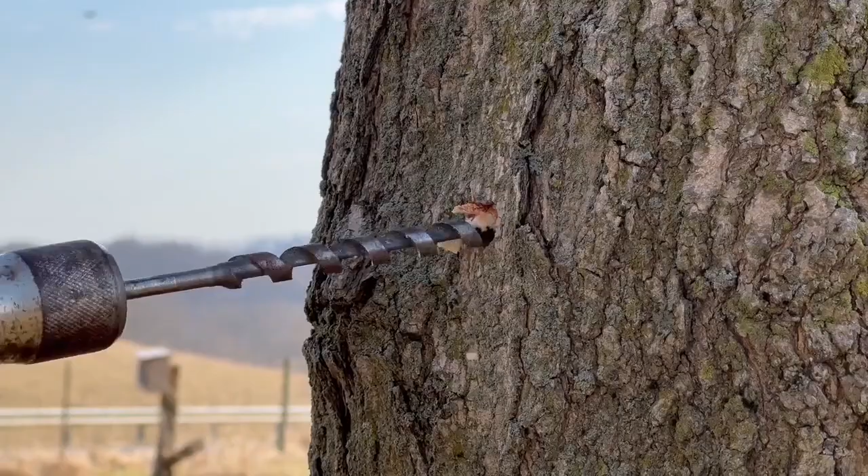Boring tools and equipment. Boring is the process of making holes in materials such as wood and metal. It is an important operation in agriculture, especially when building animal houses, fences, gates, and tool sheds. Boring is needed because holes are required for fixing nails, screws, and bolts. Boring tools include drills and bits.

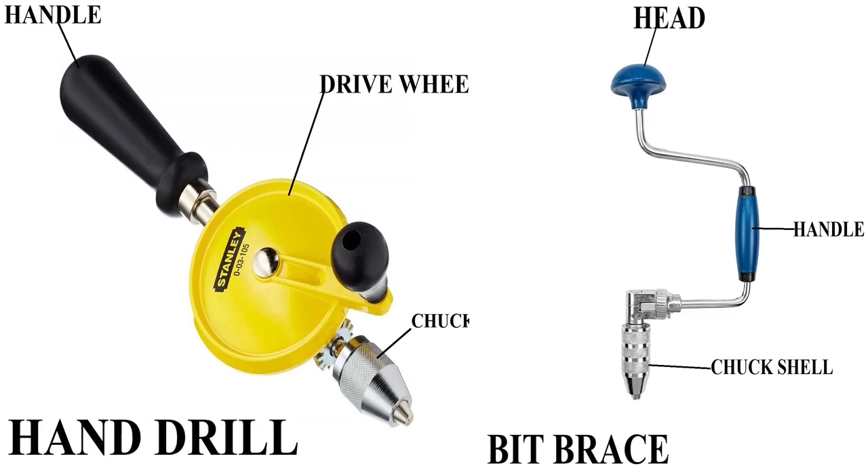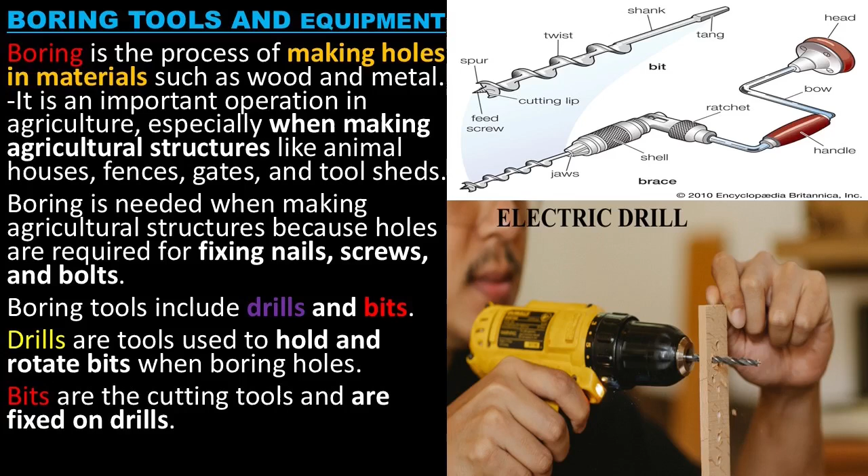Drills are tools used to hold and rotate bits when boring holes. Bits are the cutting tools and are fixed on drills.

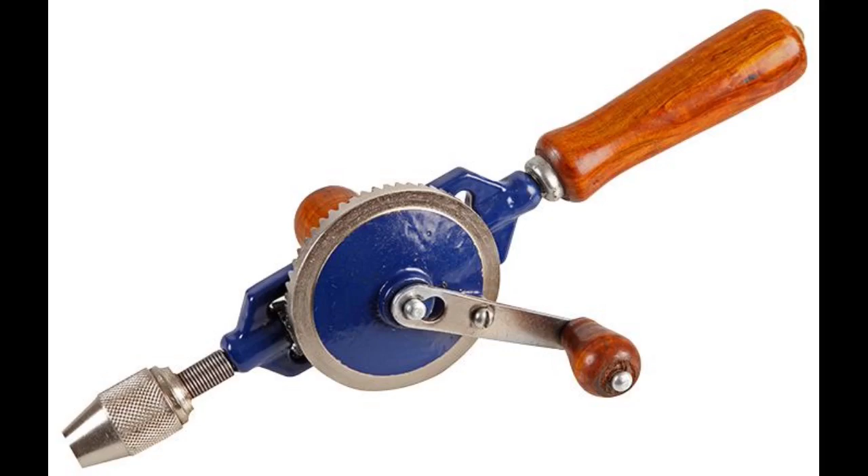Types of drills: hand drills, breast drills, bit brace, and electric drills.

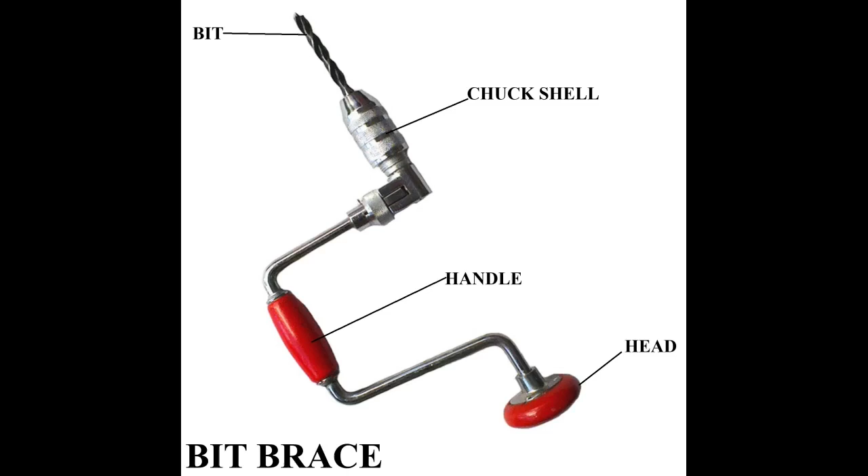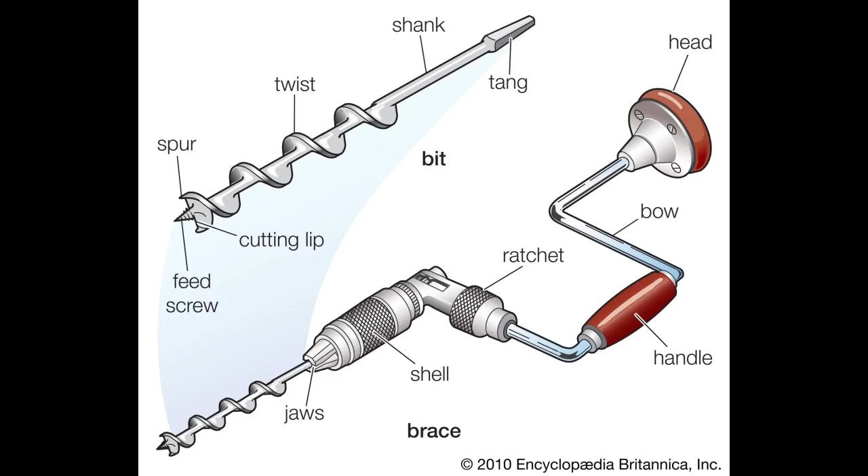Bit brace. A bit brace is a drill used to hold and turn wood bits for boring holes in wood. The desired bit size is placed in the jaws and tightened by turning the chuck shell. Bit braces are mainly used for manual drilling in woodworking.

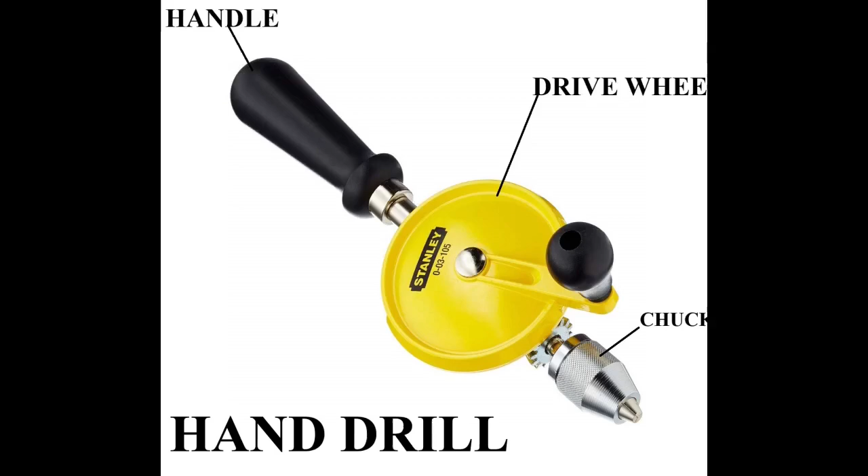Hand drill. A hand drill is used for rapid drilling of small holes in both wood and metal. It is simple, easy to use, and does not require electricity.

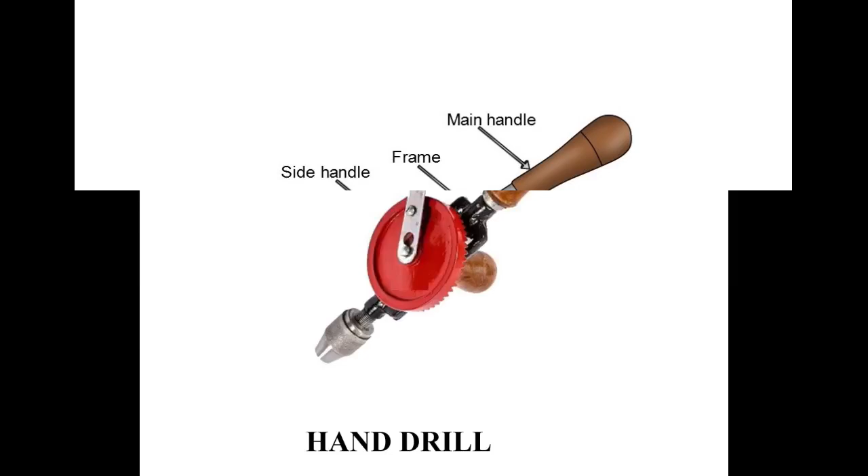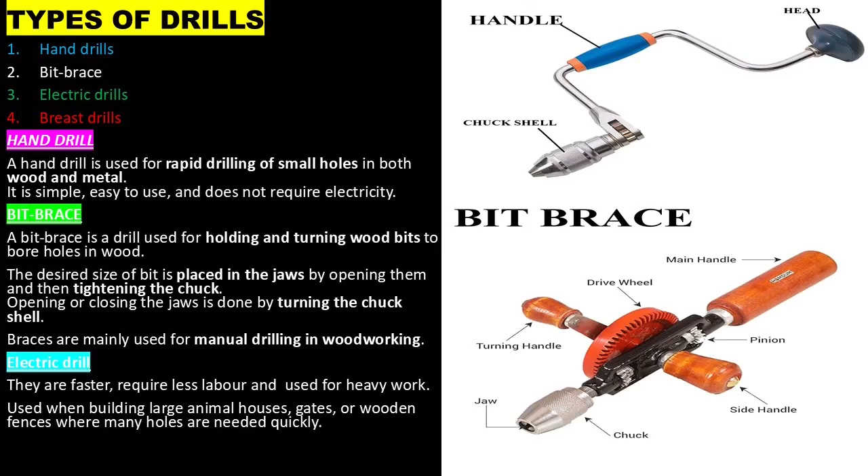Electric drill. Electric drills are faster and require less labor. They are used for heavy work like building large animal houses, gates, or wooden fences.

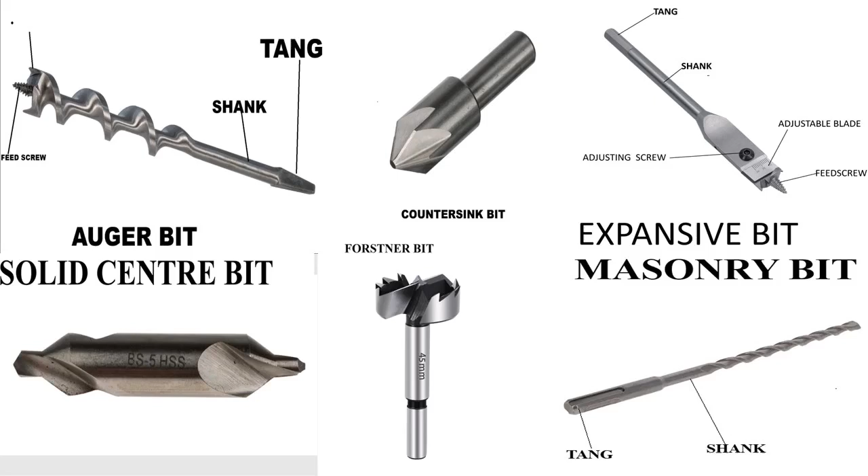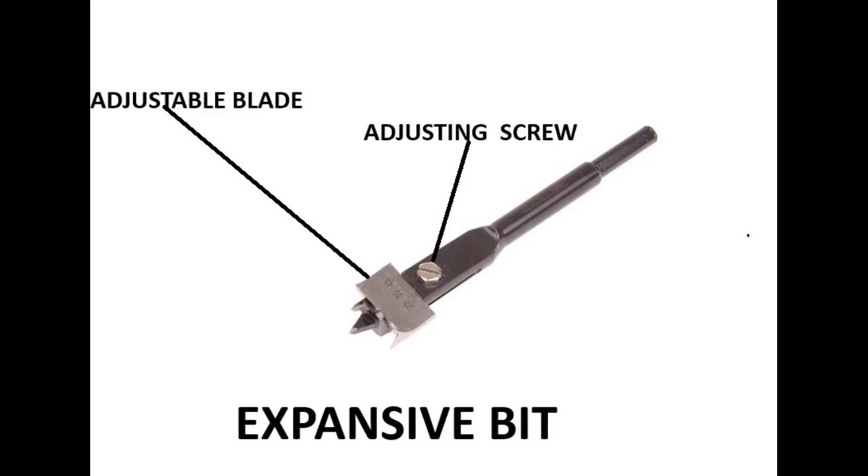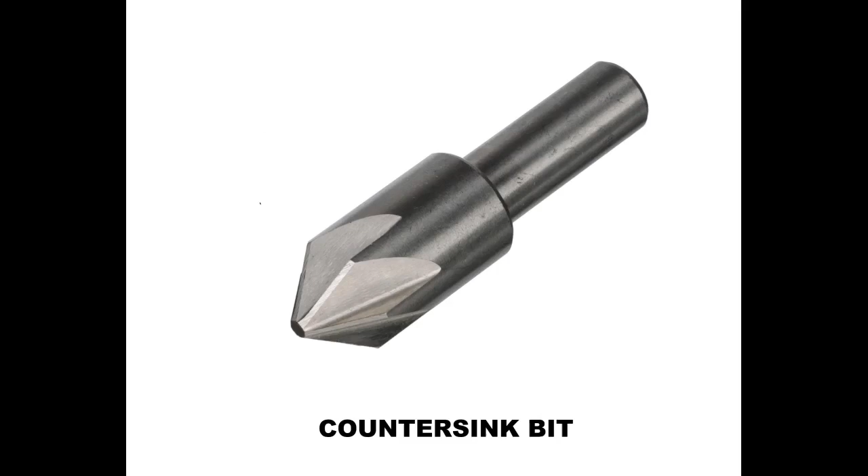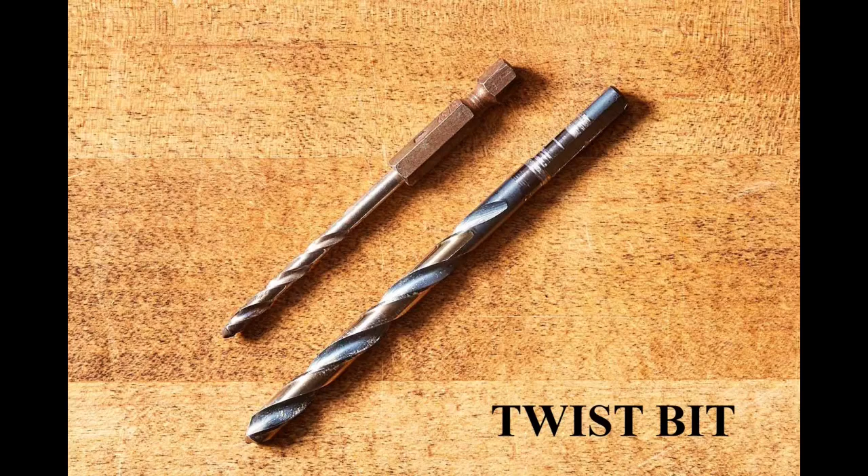Bits are cutting tools used with drills to make holes of different sizes and shapes. Common bits include auger bits, expansive bits, countersink bits, solid center bits, twist bits, masonry bits, and Forstner bits.

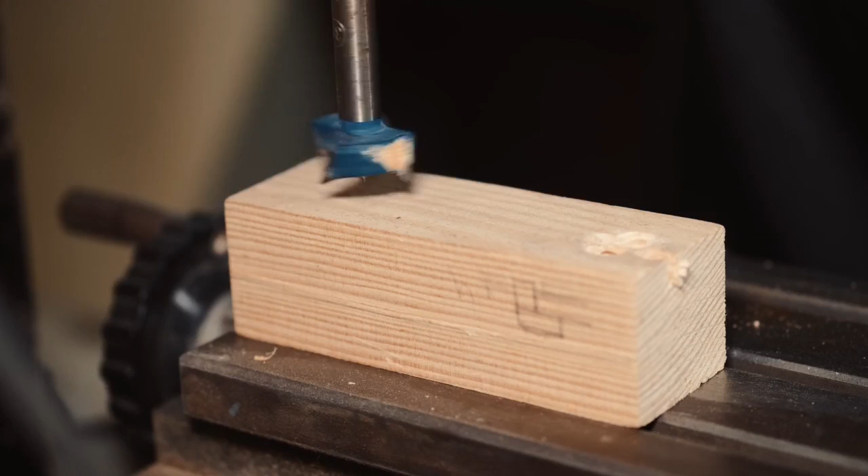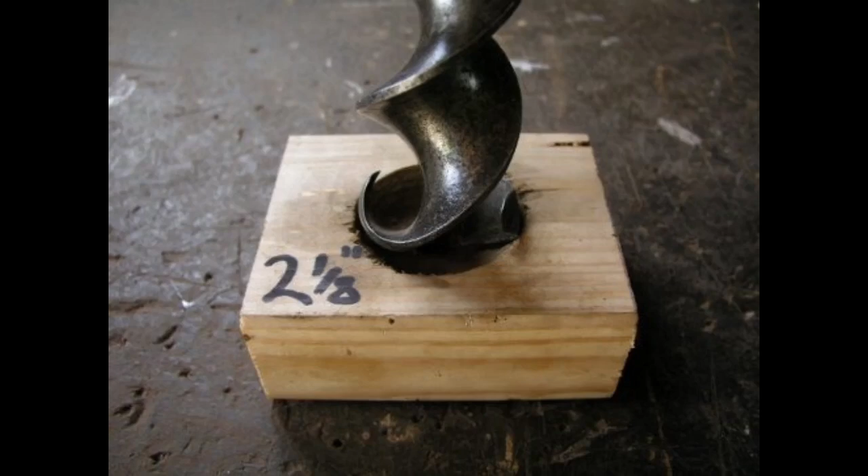Auger bits. Auger bits have spurs and a feeding screw. The feeding screw pulls the bit into the wood. The spurs help to cut clean and smooth holes.

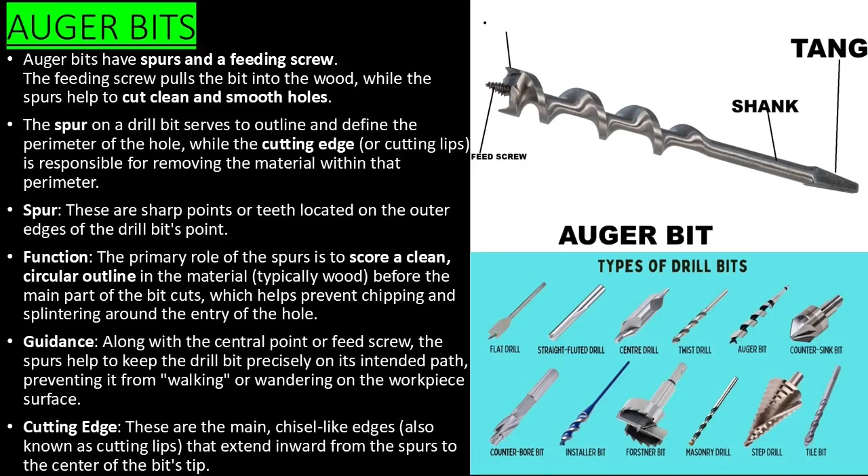Spurs are sharp points on the outer edges of the bit. They outline the hole and prevent chipping. The cutting edges are the main edges that remove material inside the outline.

Solid center bits do not have spurs. They are used for simple drilling where smooth edges are not essential.

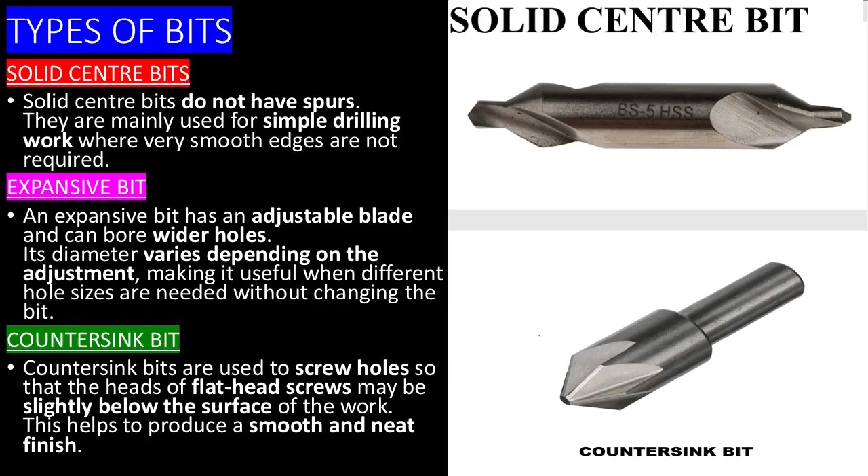Expansive bit. Expansive bits have adjustable blades. They can bore wider holes without changing the bit.

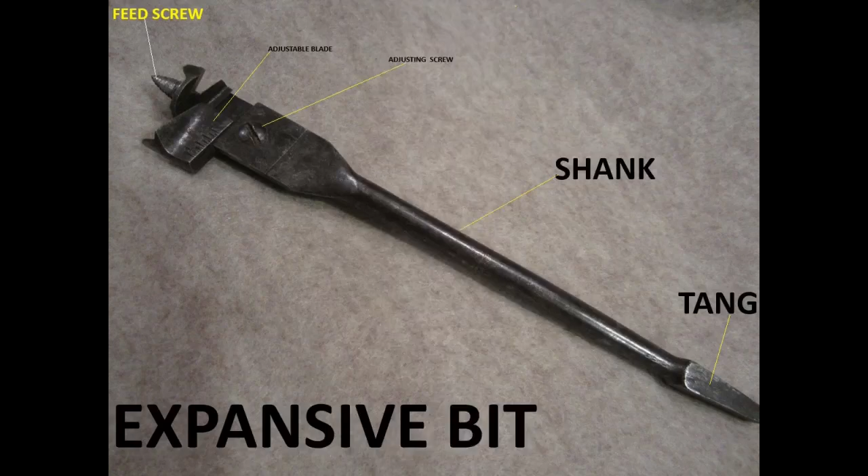Countersink bit. Countersink bits make screw holes so that flathead screws sit slightly below the surface. This produces a smooth and neat finish.

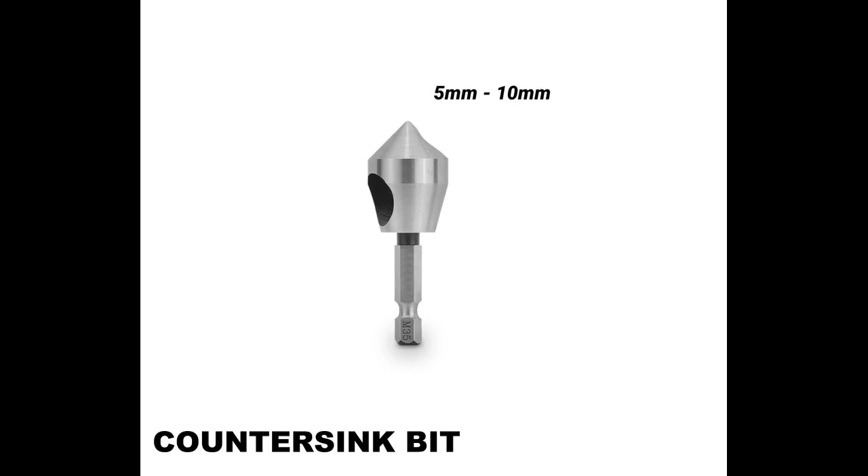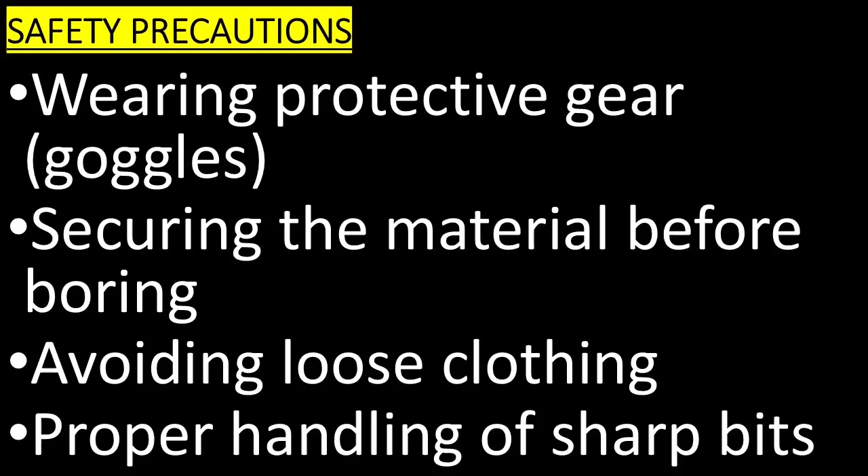Safety precautions: wear protective gear like goggles, secure the material before boring, avoid loose clothing, and handle sharp bits carefully.

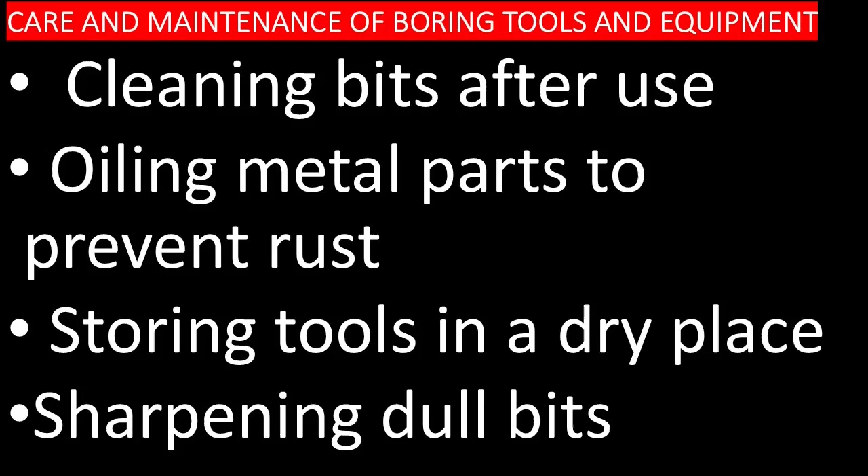Care and maintenance: clean bits after use, oil metal parts to prevent rust, store tools in a dry place, and sharpen dull bits.

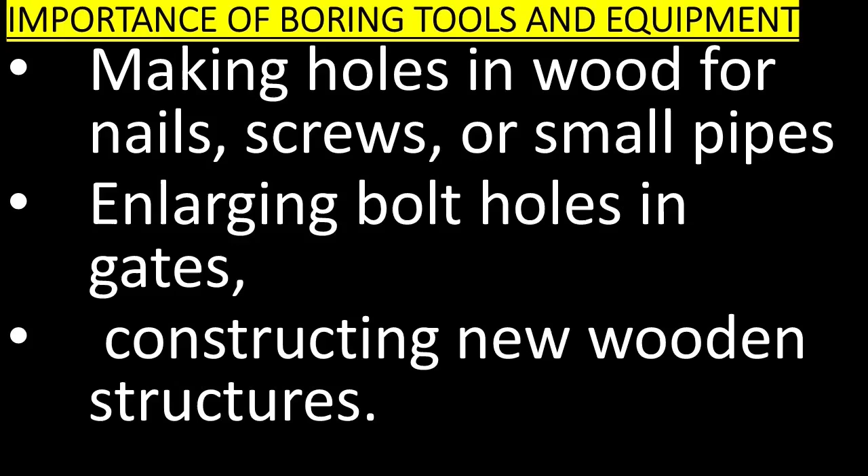Importance of boring tools: making holes in wood for nails, screws, or small pipes, enlarging bolt holes in gates, and constructing new wooden structures.